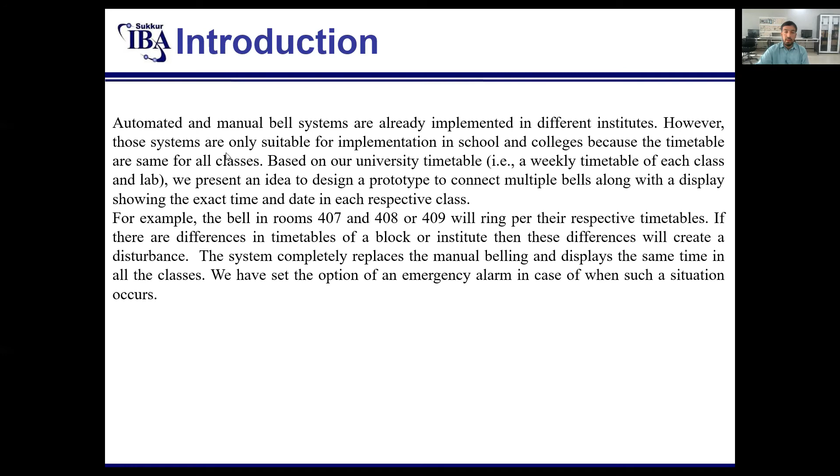Problem statement. The main issue with the implemented bell system is it cannot fulfill the need of our university because we have no fixed timetable. We have different discipline and semester students attending different classes in the same block. The manual system needs a person for ringing the bell, and we provide proper salary to that person. And the in charge might forget to ring the bell, meaning there are chances of inaccuracy regarding time.

Moreover, the clocks in each classroom do not show the same time as in the other classroom, meaning the clocks are not synchronized. There's always some delay or desynchronization among the clocks of the classroom, which will create disturbance in time-sensitive events like exams and quizzes, which are conducted in different rooms.

Aims and objective. We have four main aims and objectives of our design system. Designing of automatic bell system, then synchronization of clocks, then implementation of emergency system, and then the energy management system of Sukkur IBA University, and to reduce human effort from manual switching operation at lowest possible cost.

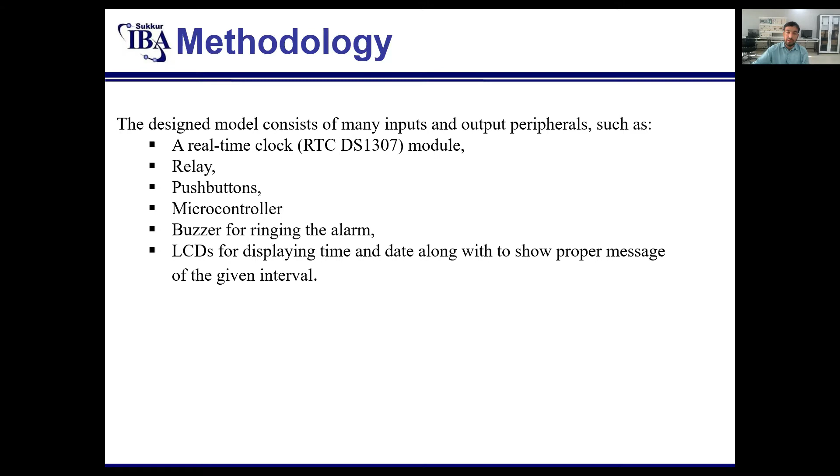Now for clock synchronization, we use the RTC module as a main source to feed the same time to each clock, which automatically counts every second once enabled. We program our device in C language, in Arduino language, to ring the bell according to the required timetable. We use DC voltage to enable the relay circuit, which turns the bell on and off to ring.

Now, here Arduino and RTC communicate serially, meaning they send data bit one after another over a single channel with the RTC DS1307 module. The IC features an inbuilt power supply sense circuit that can detect power failure and switch to the backup supply. This is the advantage of this IC. We have used a display for displaying the real time in class. Lastly, we analyze the result and collect data from the final output.

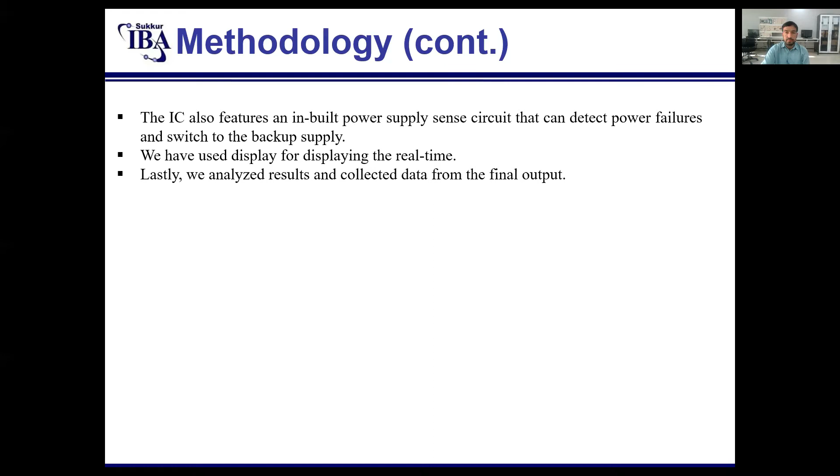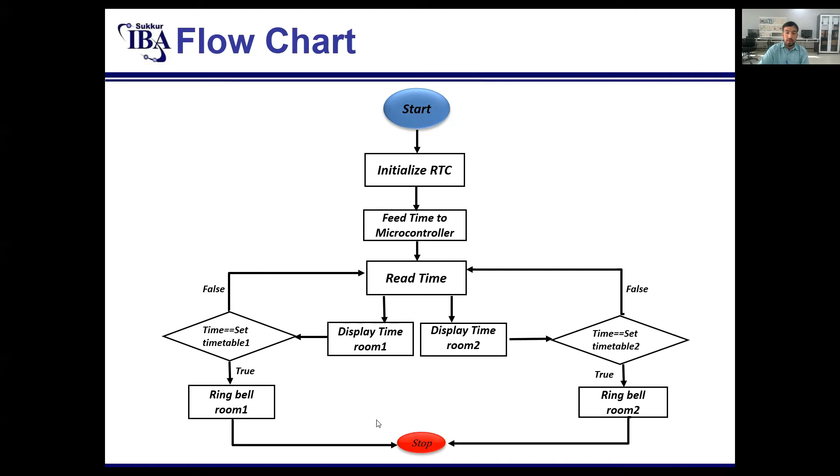Now for room number one, here the condition will be checked. If the time is equal to the set timetable, then the bell will ring. If this condition is false, then the loop will run again. And in this way, this is the overall flow of our project.

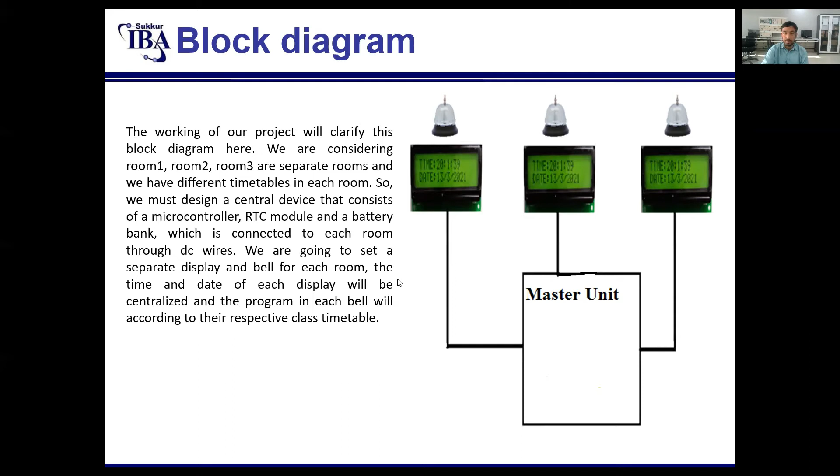Master unit. It consists of microcontroller, RTC module, DC battery bank, relays, and push buttons. The RTC module provides real time and date, and is connected to the microcontroller. The battery will provide backup supply, and the single pole double throw SPDT relay works as a switch, as decision making to ring the bell. Each bell will ring according to the timetable of the specific class, and the LCD of each room will provide exact time and date synchronously.

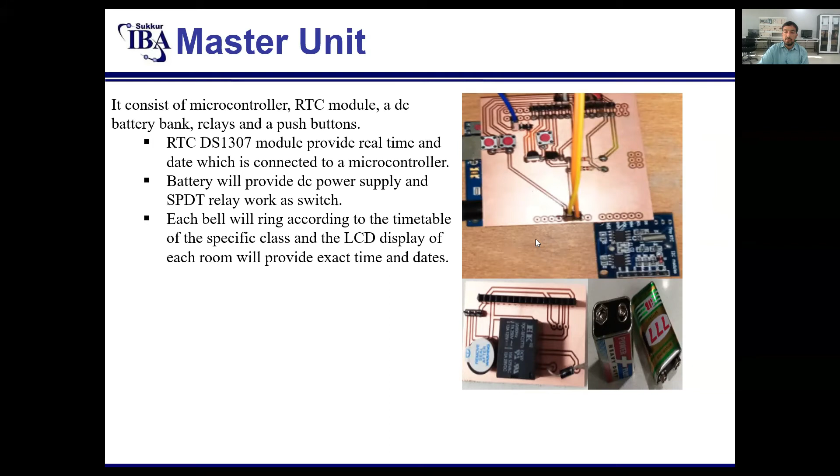Simulation. First of all, we simply define the software which we use in our project. The software we use for simulation is Proteus, Tinkercad, Arduino, Eagle, and SolidWorks. Proteus and Tinkercad we use for circuit simulation, Arduino IDE to run the coding, Eagle to design PCB, and SolidWorks to design the 3D model.

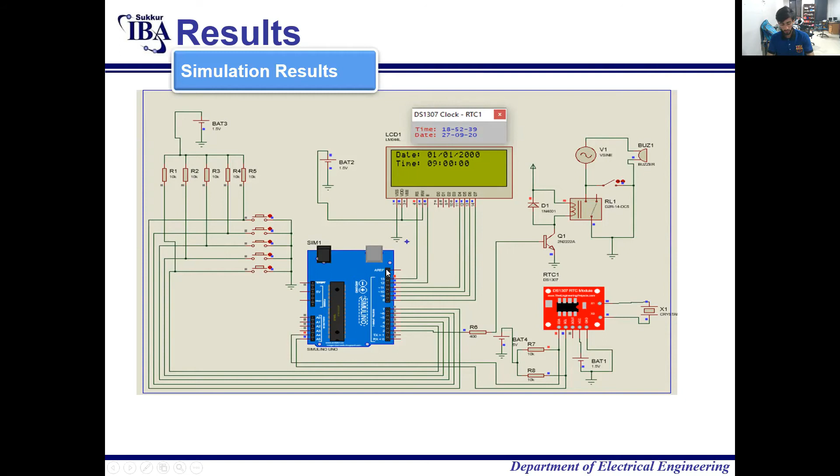So in our system, we also have an emergency system: in case of emergency, the control room can push the emergency button and the emergency message will be displayed on all the LCDs of the respective rooms where we want to show our message. The message of emergency will be shown in these rooms, and the bell will also ring.

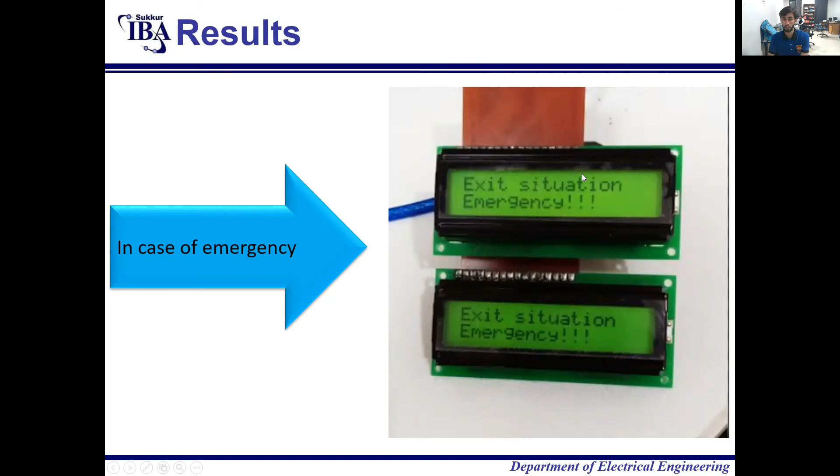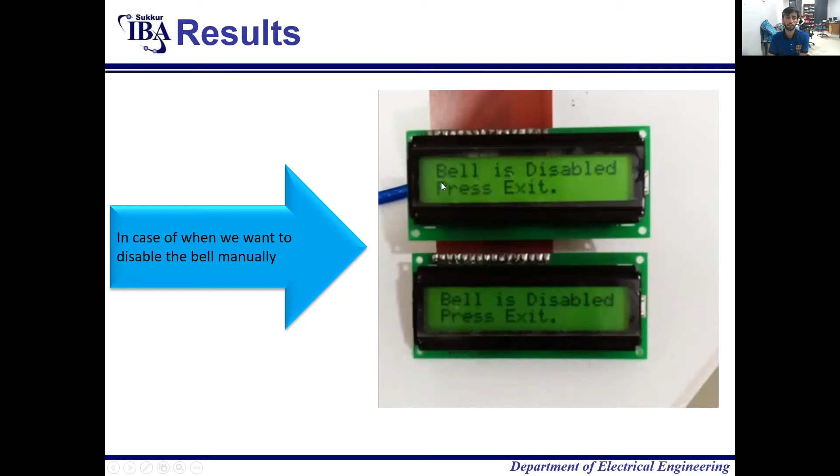So if there are holidays and we don't want to ring the bell, we can disable the bell for these days. If there are holidays like Sunday, we can disable the bell also, and the message that the bell is disabled will be shown. Okay. If there is any error in our circuit, like the circuit is open, the display will show that there is an error and a check circuitry message will be shown on each display.

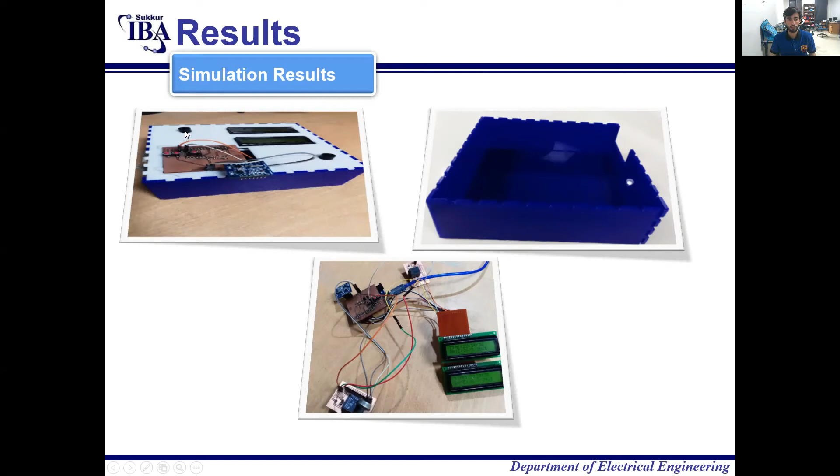So this is the 3D model that we have designed on SolidWorks. This is the whole circuitry, Arduino, time display and buzzers, two buzzers for two rooms. Right now we are considering our project for two rooms. So we implemented the prototype of two rooms, and this is the whole circuit that we have. Here is the buzzer, the figure is a little bit not clear. Here is the buzzer for the first room and time display for the first room, and time display for the second room, buzzer for the second room.

So our target was to design a prototype of an automatic bell system, synchronization of clocks, and implementation of the emergency system in Sukkur IBA University within separate rooms. We achieved this target using a microcontroller, real-time clock DS1307 module, display and logic programming. In case of emergency, we had a manual button in our device and also an option to disable the system. It was our project.

It can be further extended for a whole block or more than two rooms. It can be implemented for real time with a few amendments. It can further be extended for energy utilization with the automation of classrooms, air conditioners, and lights. More often, students leave the lights and air conditioners on after leaving class. Say for example, if class ends at 1 p.m., it must be automated in such a way that at 1:10 the lights and air conditioners are off so that we optimize energy utilization.

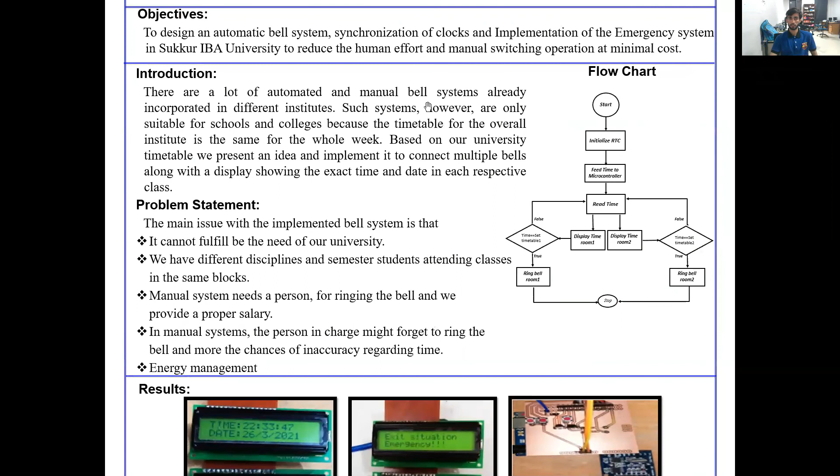The overview of our project. Centralized timing and bell system for Sukkur IBA University. Our aim was to design an automatic bell and clock synchronization of the classrooms and an implementation of an emergency system in Sukkur IBA University to reduce the human effort and manual switching operation.

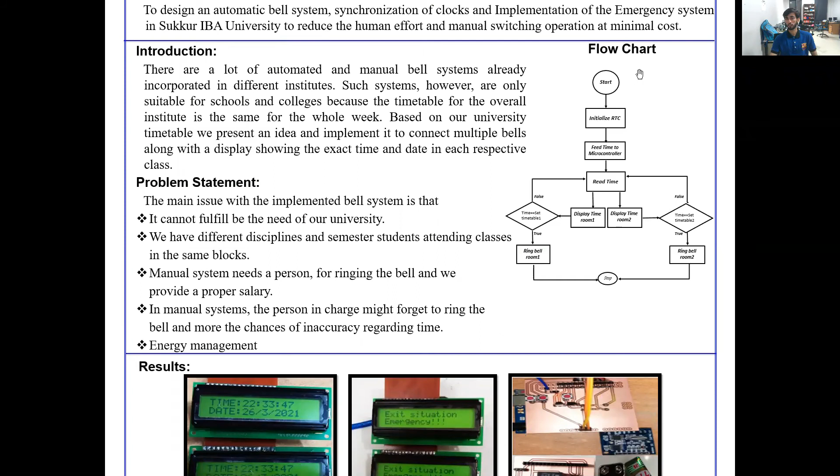So this is the flow chart of our project. First we have to initialize the real-time clock. The real-time clock will feed real time to the microcontroller. This real time will be displayed on both rooms' time displays, LCDs. Right now our project is for two rooms, and then the condition will be checked, the condition for the timetable that we have set for the bell time of room 1. Let's suppose we set the timetable for room 1 to ring the bell.

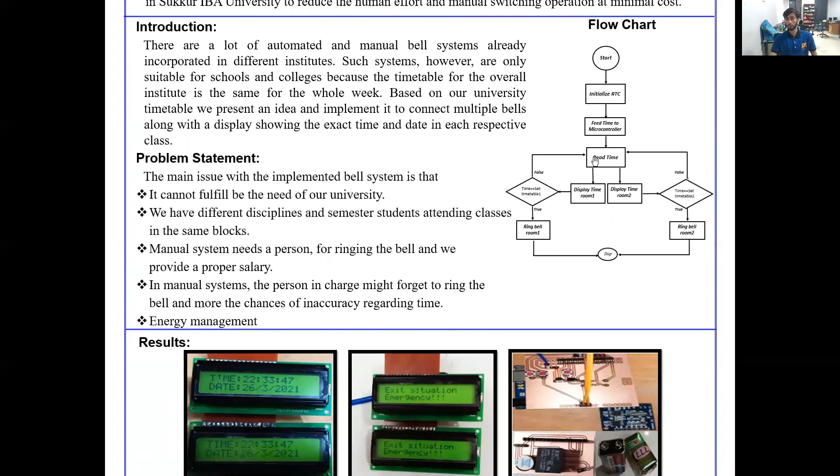If the condition is fulfilled, if the time becomes equal to the set time that we have for the bell time, the bell of room number 1 will ring and stop. If the time is not equal to the set timetable, then it will read the time again and check the condition again. So the loop will be continued. In the same way for the second room. So this is the overall flow chart.

These are a few real-time results that we get from our project. This is the clock synchronization that is clearly shown. In case of emergency, we set manual buttons like an emergency button, bell disable button, and stop button. So in case of emergency, we can manually ring the bell and the emergency will be shown on both of the displays. In the same way, the bell can be disabled for holidays, and if there is any circuit error, like the circuit is open, the message will be shown on the LCD displays that the circuit is open.

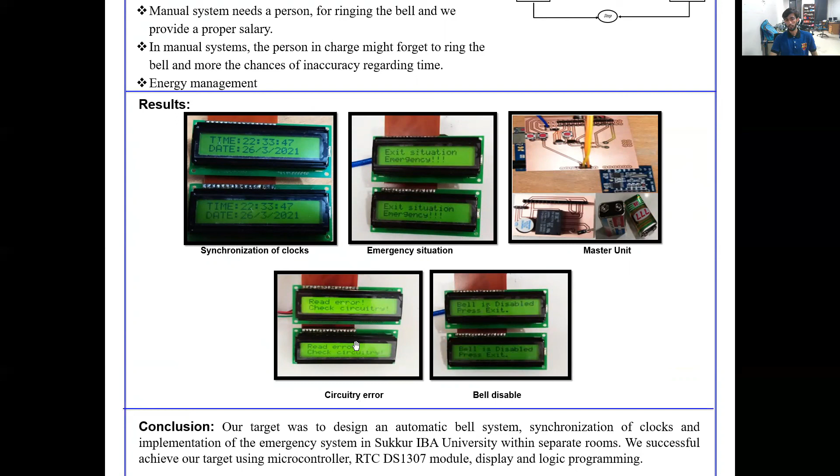So we achieved this target using a microcontroller and real-time clock DS1307 for two rooms. It can further be extended to implement it for a whole academic block or more than two rooms. So this was the overall overview of our project.